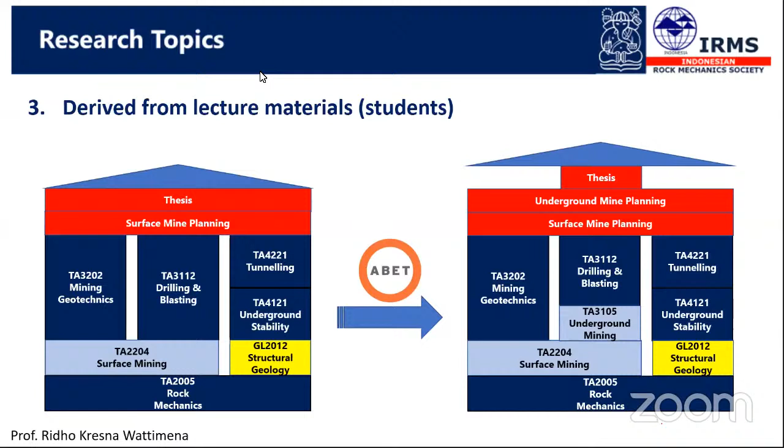Talking about the students, this is the building of our curriculum, especially in what I would call a rock mechanics stream. On the left-hand side is our curriculum before ABET came to our university. At the beginning we have rock mechanics as the basic subject, and then surface mining, structural geology, mining geotech, drilling and blasting, underground stability, and tunneling. We only had one design subject, which is surface mine planning, and then thesis for the undergrad was still 5 credit units.

Starting two years ago, ABET came to ITB to do the accreditation, and they requested us to add more subjects in underground mining. So we developed underground mining subject and underground mine planning. Now the thesis for undergrad is reduced from 5 credit units to only 2, because according to ABET, undergrad students are not researchers, they are designers. So we had to add more subjects on design and planning, including underground mine planning to support the thesis of our undergrad students.

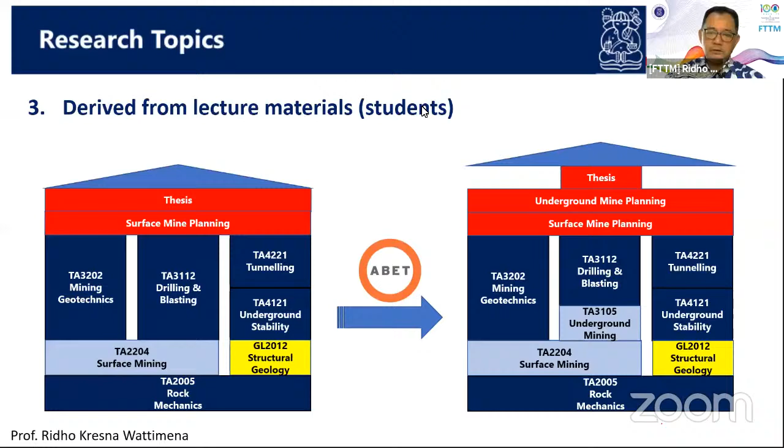Next please. This is some examples of our research - I cannot put it all in one slide. I would start with rock characterization. As Pak Seno mentioned earlier, we have many researches in rock characterization, both in laboratory and in field.

We have long-term strength determination in laboratory, either with UCS test or with shear test. We also develop, still in laboratory, hydrofrac simulation to study the best direction of the spray in creating fracture in the rock.

We also have a number of resources for underground construction. For example, we used to have a Goodman jack - it's already gone because of the disruption when we did underground research in one of the underground gold mines in Indonesia. When we had the Goodman jack, we did some measurement of rock deformation modulus on site. We also did some research in determining the in situ stresses in field directly or indirectly in lab.

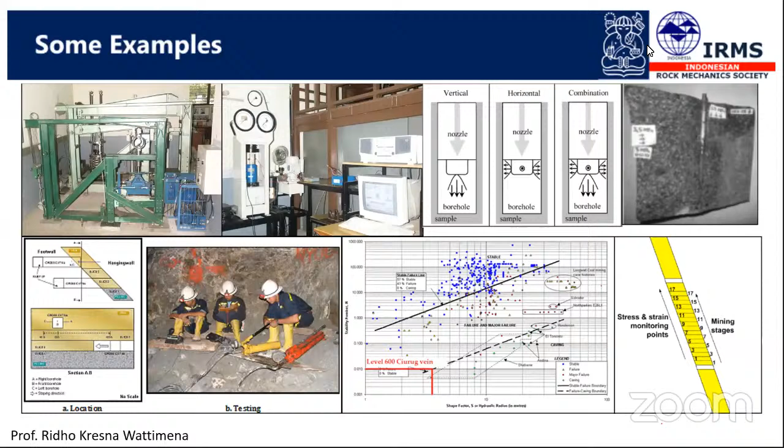But now with ABET, the main team members of the research are only postgrad students, because as you see, ABET considers undergrad students not researchers but only designers. So that's it, Pak Khamarrul. I took 10 minutes, 54 seconds. Thank you very much.

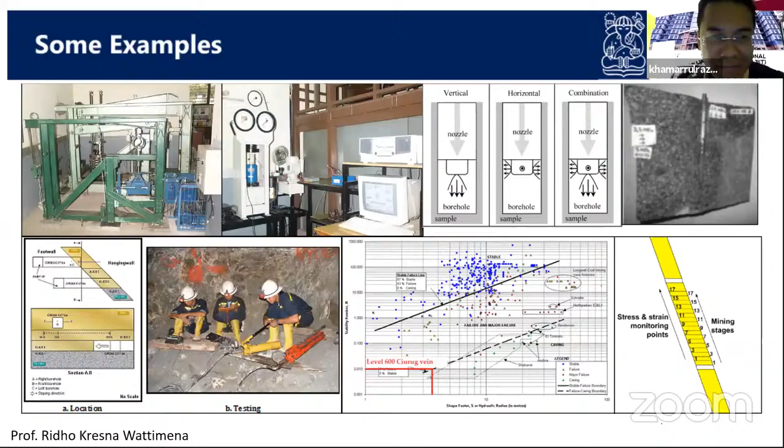Thank you very much, Pak Ridho, for sharing with us. I do believe 10 minutes is not enough for him to share all his experience, particularly dealing with this academic world, as well as how he used theory and fundamental principles and tested it in real environments. I'm happy to see some of the changes you've made in the curriculum related to underground mining topics. Congratulations to your faculty, ITB, for great transformations. I think we have to admit to the needs and demand by the industry. There was some reason behind the move, but I think it's always a positive reaction by the industrial players. Of course, we would like to welcome all the participants.

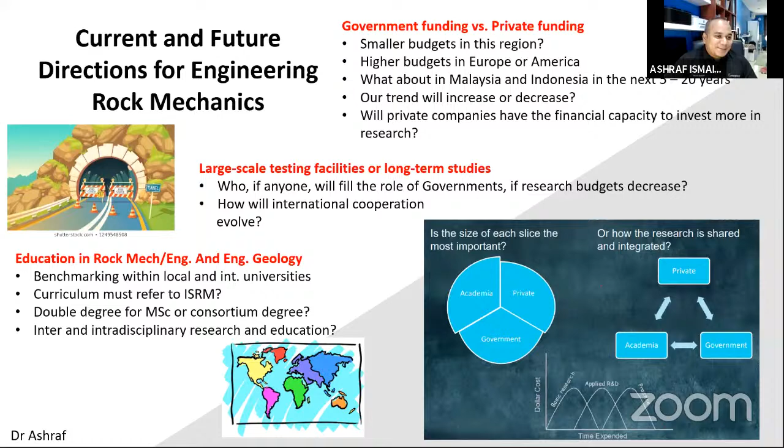Part of our research in rock slope, particularly at USM and in Malaysia, focuses on what we call rock anisotropy, which is one of the well-known phenomena related to heterogeneity in the rock mass. We know that discontinuity in the rock mass is very important because it doesn't have the same and similar strength as the intact rock, and the strength of discontinuity will induce rock slope failure.

So we can see that now by using new technologies, such as UAV photogrammetry, the terrestrial laser scanner, and some image analysis using Cloud Compare and other software, we can optimize the work in identifying the direction and orientation of the joint discontinuity.

As Encik Mak Foh explained at the beginning of the lecture, the fundamental concept is very important, where we as practicing engineers or researchers need to understand the fundamental aspect. For example, the constitutive model and input properties must be correct. But when dealing with rock, it's not just uniqueness that matters—we need to understand the influence of spatial variability, because rock mass is a heterogeneous material. So we cannot rely on a single unique parameter as input; probabilistic sensitivity analysis will play a very important role.

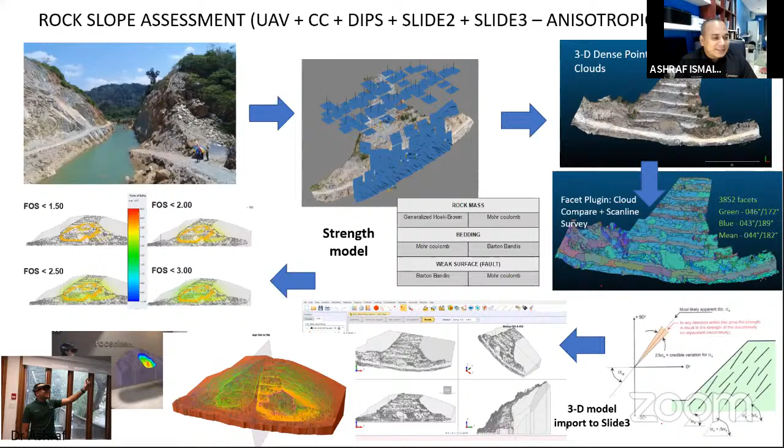A similar comparison study was also done by taking samples from the Shinkansen linear tunnel project in Japan, connecting Tokyo to Nagoya.

We know that the development of faults and shear fracture systems, over a broad range of temperature and pressure, can involve the growth and interaction of cracks, starting from crack initiation.

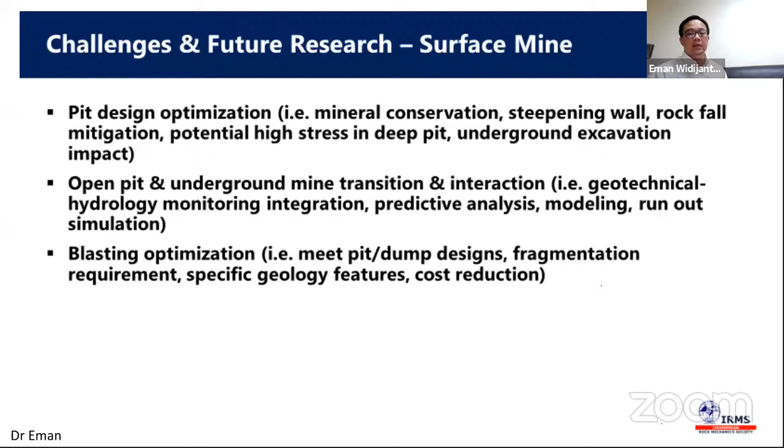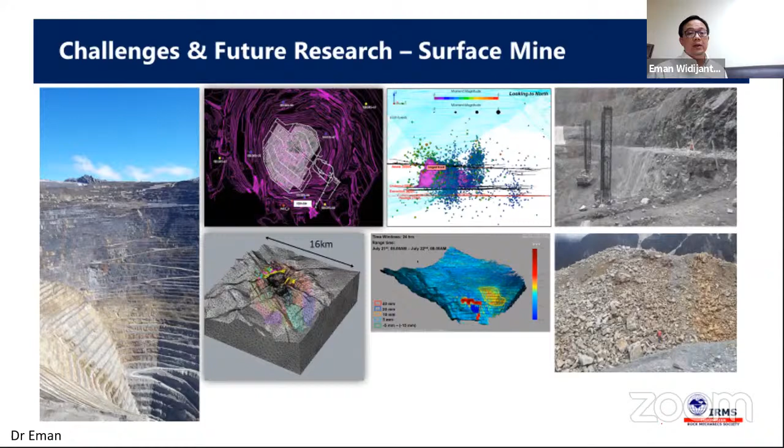Real-time monitoring, through seismic monitoring and different types of scanning systems, are other challenges for us, which we optimize to provide safe working criteria or TARPs, trigger action response plans, to secure our people who work in the underground mines.

We also deal with specific ground conditions for drifting or tunneling, say for example weak ground, squeezing ground. Also, some of the water has low pH, becoming an issue in terms of corrosion, and this needs to be managed in terms of specific ground support requirements.

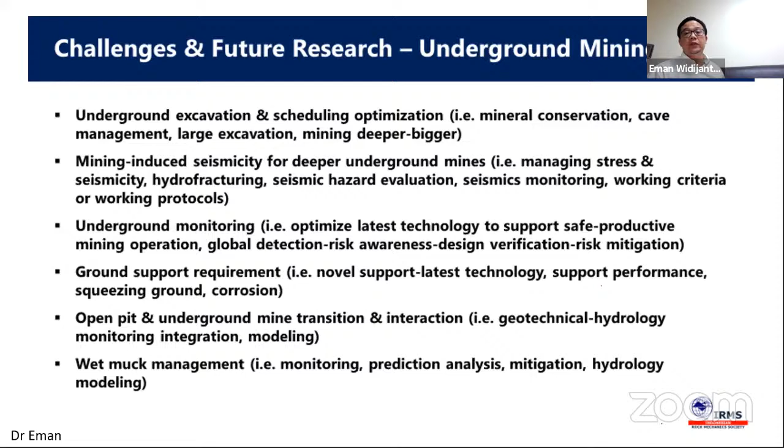Several of them are real-time, and the other is seismic monitoring. This is the monitoring we rely on for supporting underground operations, especially microseismic monitoring, to secure the people and do evacuation once the working criteria has been achieved.

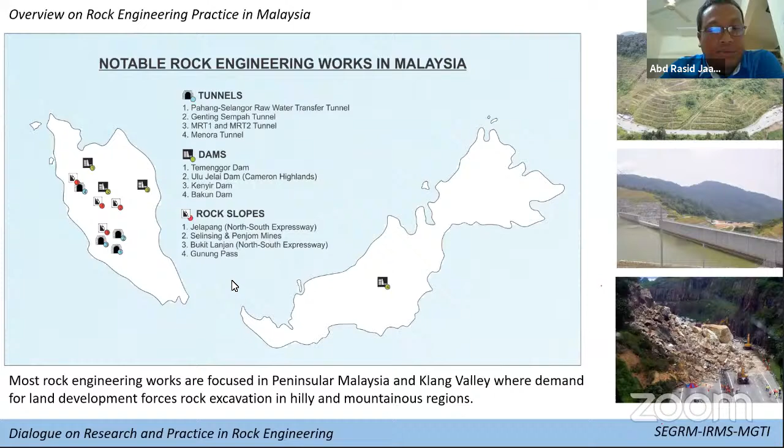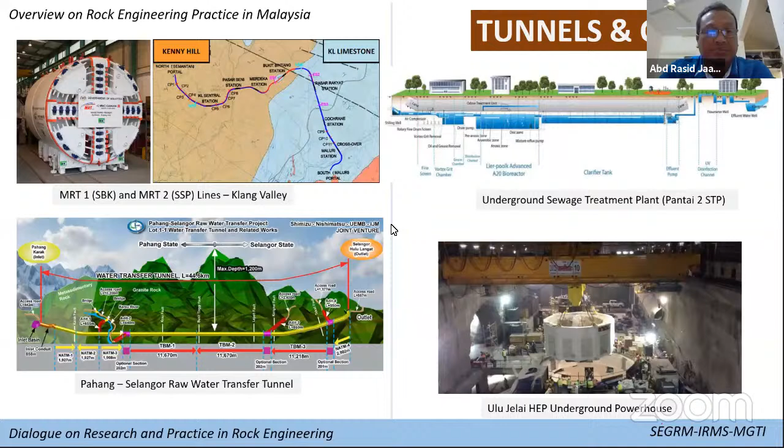Next slide is on dam. This is storm water management and road tunnel. I think this is the biggest achievement of the tunneling community in Malaysia, a multi-award winner. You can get all the information, all the videos on the smart tunnel from National Geographic Channel, Discovery Channel, or many YouTube channels. This is combined stormwater management and road tunnel.

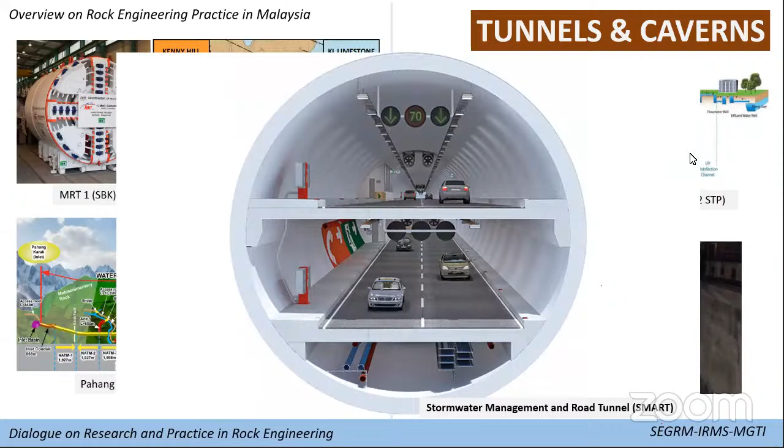During dry periods, when there is no flood, we can use this tunnel as a road tunnel. But when there is high intensity rainfall, then this tunnel will be closed and transferred to become stormwater management, to prevent flooding in Kuala Lumpur. So this is not only smart in terms of the name, but in terms of application as well. Next.

So next is a dam. We have about 52 large dams. Large dam under ICOLD definition is 15-meter height, and then there's several other criteria. So 21 dams are for power generation, 31 for water supply irrigation. I just want to touch on the several dams that involve heavily with rock engineering.

Ulu Jelai hydroelectric dam actually has an underground power station, as I mentioned before, and then in fact they have one fault also crossing near the dam, so it's very challenging in terms of construction of the dam.

And then we have Kenyir Dam, on the top right. So beside the dam, we also have several tunnels for power generation.

And then we have Sungai Selangor Dam, where I was involved with the grouting works, instrumentation, as well as diversion tunnel. They have a temporary diversion tunnel because they cannot stop the water from flowing, about 800 meters drill and blast. Then after completion of the dam, they seal back the diversion tunnel.

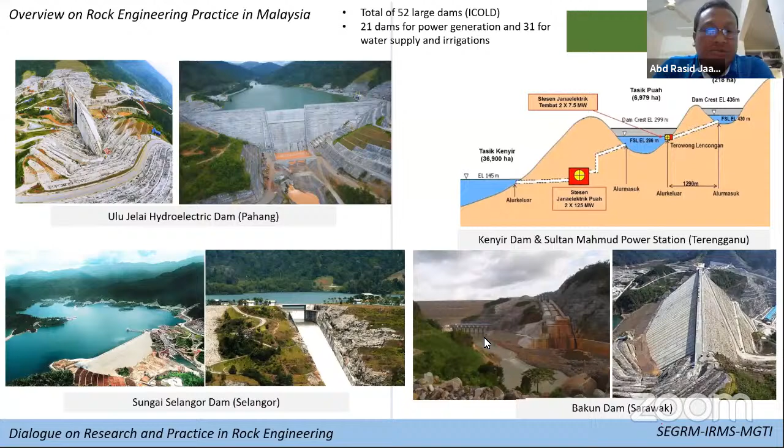Next is rock slope, the next slide. Yeah, this is the last slide. We have many slopes, many rock slopes passing through these highways. We have many highways in Peninsular Malaysia.

One interesting one, on the top left, is Gunung Pass, Simpang Pulai, Kampung Raja Road. This is towards Cameron Highland, if you're familiar with Cameron Highland. So this is a very classic example of how geological factors really control the stability of the cut slope. So you need a combination of geologist and engineer to solve all this problem.

And interesting, if I can recall what Professor Resat, the current president of ISRM, when he presented his short course in Kuala Lumpur three years ago - he mentioned about the soil and rock characterization, when to use soil mechanics, when to use rock mechanics. So it's a very interesting observation actually.

And then on the bottom left we have Bukit Lanjan, the rock slide field. It did not kill anybody, but in terms of losses, actually this is among the biggest losses due to the rock slide or landslide, because the road closed for almost a year, and then a lot of economic activity was affected by this closure of these major roads. You can see the big block is as big as a bungalow.

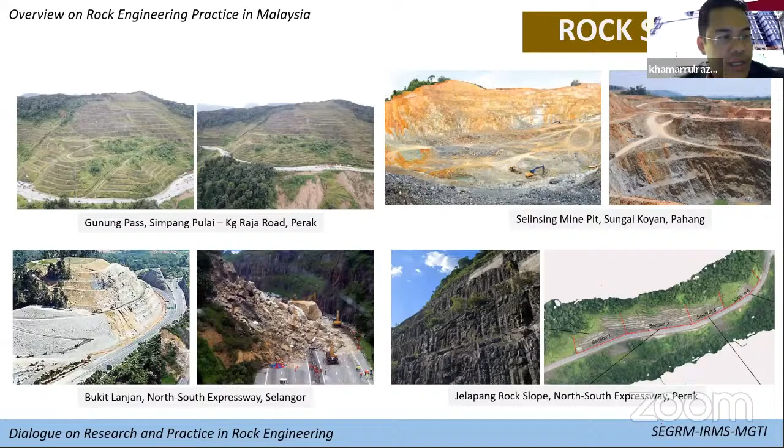Please, Dr. Eman. Okay, thanks again. In this second round, let me start with the first part of our experience regarding development of engineering classification of weathering grade. As far as I know, this was also presented by our colleagues from Malaysia. Talking about weathering, I think it's very important in our country, especially in Indonesia, lying on the semi-tropical equator region, where we have very intense weathering processes. In general, it's expressed by thick residual soil that can reach individual thickness of more than hundreds of meters. This is quite common; we can find it in Indonesia.

In this regard, we developed important indicators and suitable, reliable techniques most applicable in Indonesia, especially those based on the assessment of degree of discoloration of rock material, including rock mass. We also identify changes in mineralogical composition, especially from laboratory analysis. Also, we analyze the destruction of original rock texture and fabric, so we compare rock-to-soil ratio to develop this degree of weathering.

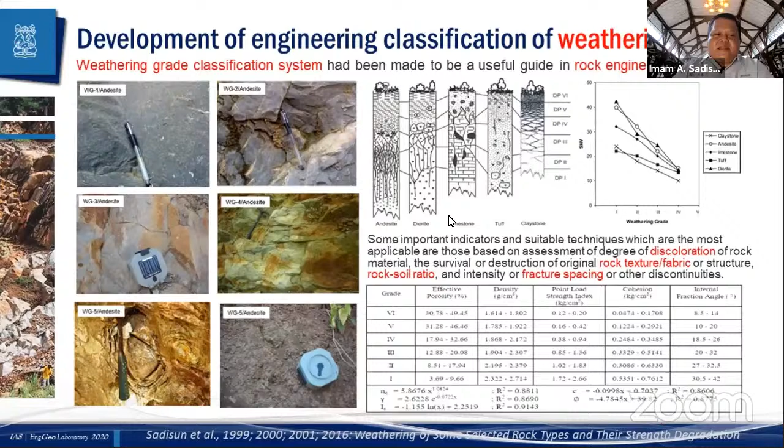Let's move to the second experience, which regards improved slaking index tests for characterizing clay-bearing rocks. This activity was driven by many problems related to the rapid growth of infrastructure lately in Indonesia. We have clay-bearing, or argillaceous, rocks that show physical deterioration behavior progressing over time, which we often call rock slaking behavior.

Due to this behavior, many slope instability and foundation problems arise in infrastructure development, such as in the Cipularang Toll Road in West Java. We also have problems related to this behavior in the Semarang-Solo Toll Road, and in many other places in Indonesia, from Papua to the Aceh region.

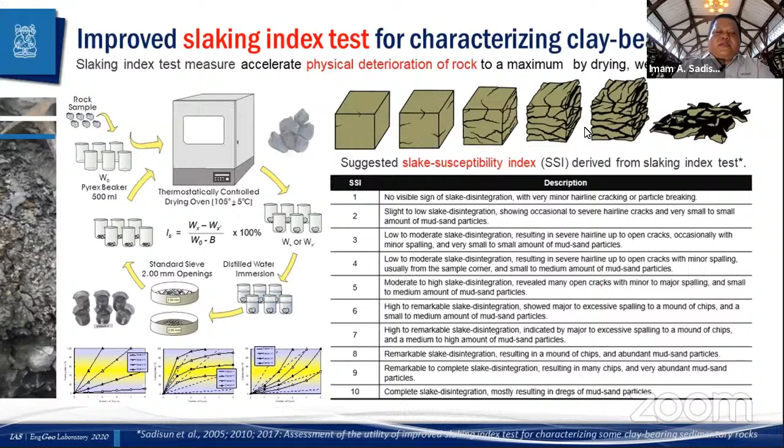Then let's move to the third experience. I would like to share our experience with regard to integrated rock slope stability analysis for slope management. We have main application in Central Sulawesi, especially along a 30-kilometer long segment at the Tawaeli-Toboli National Road of Central Sulawesi. As we know, in that region the topography is very rough, with steep and very steep slopes.

This area lies on metamorphic rocks and also molasse deposits. We already wrote the result of this analysis into a paper entitled 'Towards Development of a Slope Management System along the Tawaeli-Toboli National Road segment, Central Sulawesi.'

In this regard, we made a modification from the rockfall hazard rating system suggested by Pierson 2005, and we give some modification and integration using the empirical continuous slope mass rating suggested by Thomas. You can see some figures related to the continuous slope mass rating in my presentation here.

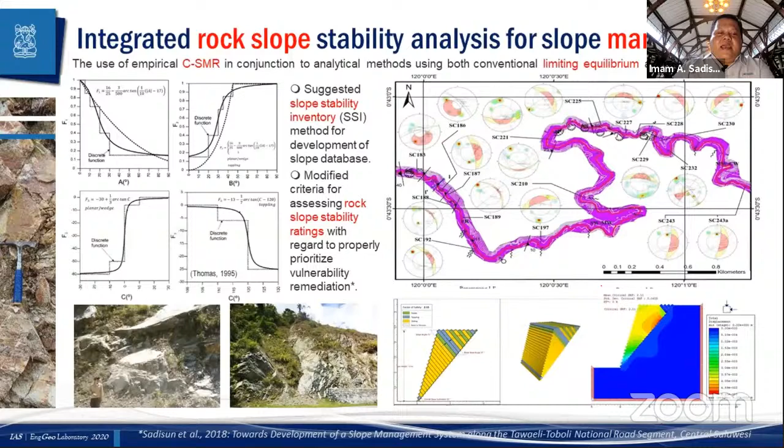And the last research experience that I would like to share today is related to runout distribution modeling of some debris flows in Indonesia.

Talking about landslides, I think Indonesia is also a very prone country for this disaster. We have many landslides that occur especially during the rainfall season, and we have an intensive weathering process, so that's why landslides can be found in many places in Indonesia.

And one of the important landslide types that often causes a lot of casualties and very heavy damage is debris flow. I call this type of debris flow the most dangerous gravity killer in Indonesia due to the lot of casualties it causes.

From this regard, we do modeling. Of course, we applied the concept of the modeling based on the momentum equation and flow mode, continuity of the flow model, and also river condition, erosion and sedimentation process during the flowing mechanism.

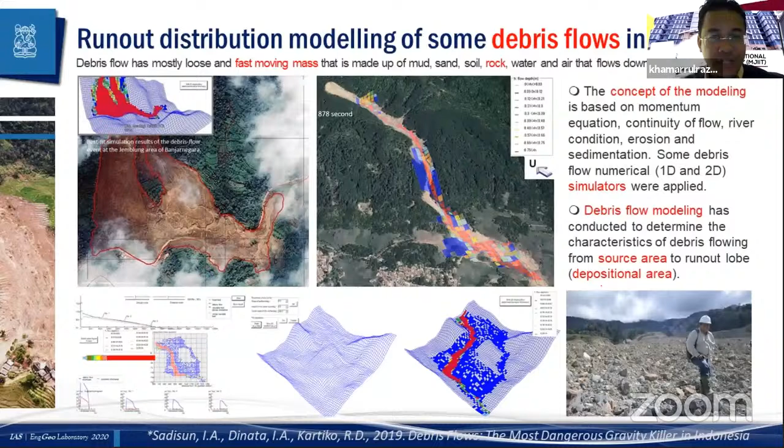So, let's move to the last speaker. We kept it the last one so that everybody got excited. But the only lady in the list of panelists, Dr. Rini, are you ready? I hope we can hear some new insight, story, and experience from the academic world as well as from the practitioner world. So without further ado, Dr. Rini, the floor is yours. Thank you so much, Dr. Khamarrul.

So again, for this cycle I would like to begin the presentation in terms of the academic programs offered in public universities in Malaysia. We have here the University Technology Malaysia, University Science Malaysia, University Malaya, National University of Malaysia, University Malaysia Sabah, University Malaysia Pahang, and also University Malaysia Kelantan. So we can see that the major program offered is more focused on civil engineering.

Of course, there are other programs offered, but now I'm trying to focus on civil and geoscience or geology programs. We can see that most universities offer the Bachelor in Civil Engineering together with the Bachelor of Science in Geology. Some universities offer other programs such as Bachelor of Science in Natural Resource Science and Bachelor of Engineering Mineral Resources at Universiti Sains Malaysia.

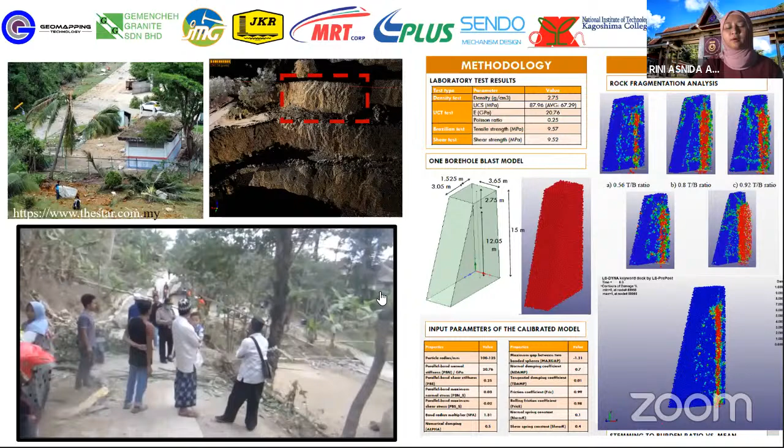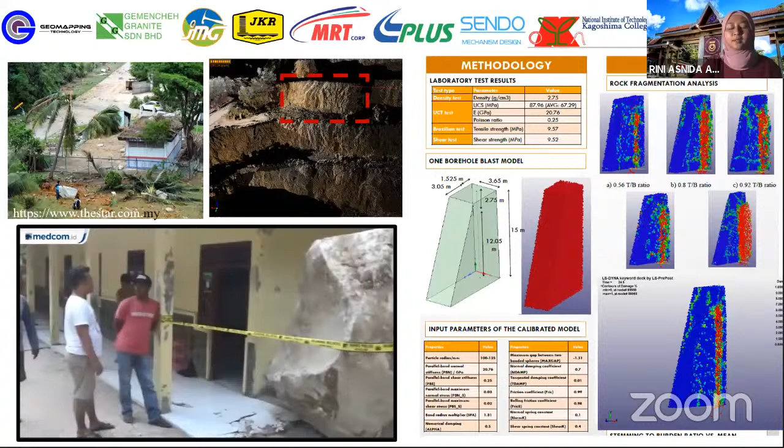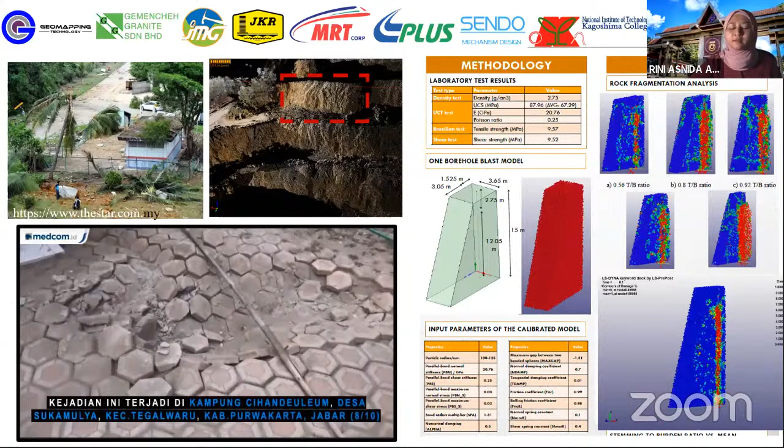Moving on to the research field, this is not only our own interest but involves collaboration with industry. We have many industry collaborators such as GMT, Gemencheh Granite, and authorities like MRT, JKR, and JMG, as well as international collaborators. We have Sendo Mechanism, which provides 3D transducers to monitor displacement in three dimensions.

We also have a very long relationship with the National Institute of Technology, as well as Chongqing University from China, where we are working on transparent soil and AE.

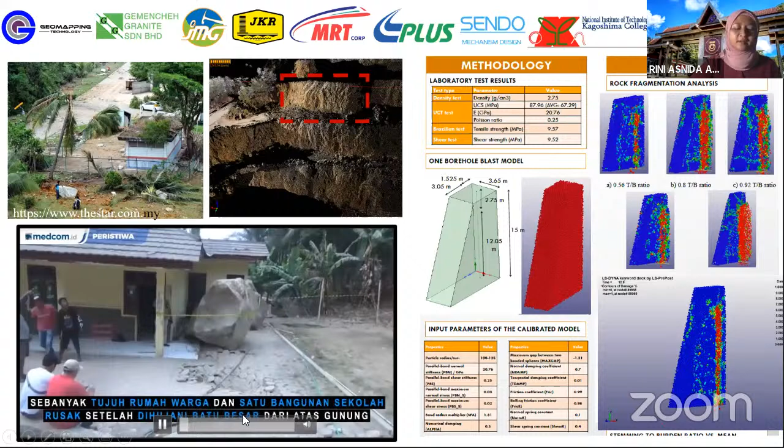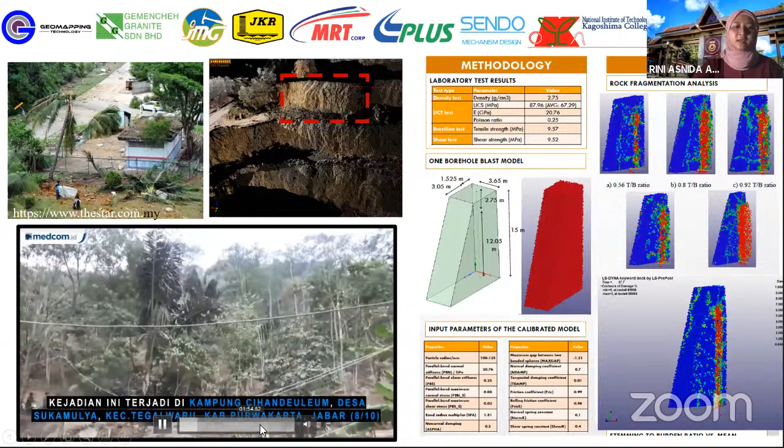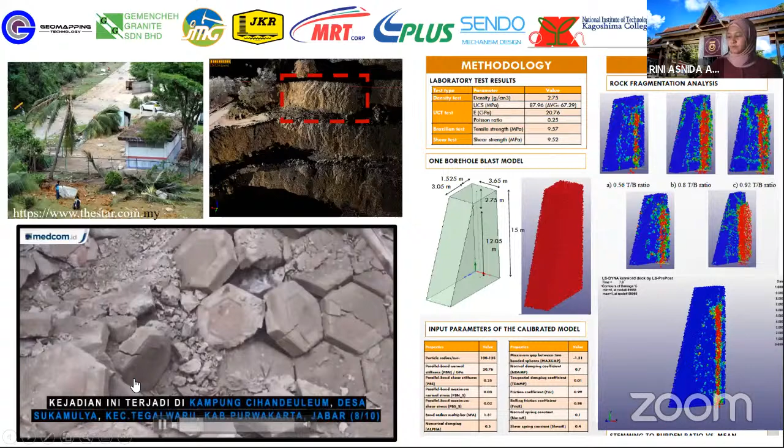There's a lot of research ongoing at UTM, but here I'd like to show some recent ones. You can see the video on the bottom left, which is quite famous on YouTube - this is the flyrock incident in Indonesia, and in Malaysia we experienced similar events. At the top left we have the Masai flyrock that occurred in 2013, and other events in 2008 in Perlis and in 2019 in Ipoh.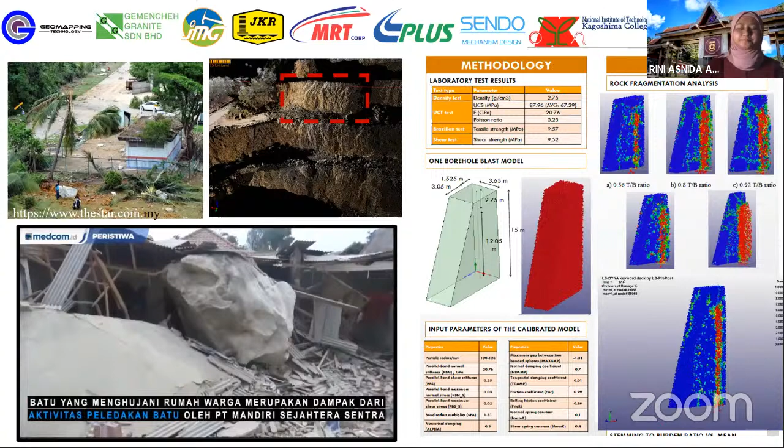So we can see that there is a need to understand, because if we want to carry out the study, you need to have a problem that we want to search. So that will be a better kind of research where we can contribute back to the industry or to the community as well.

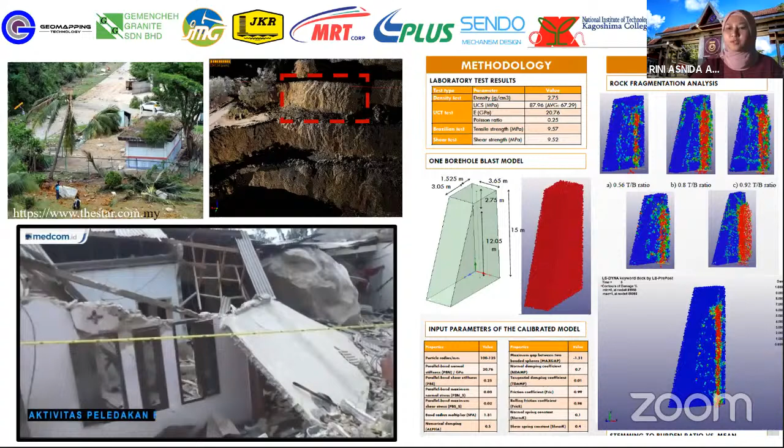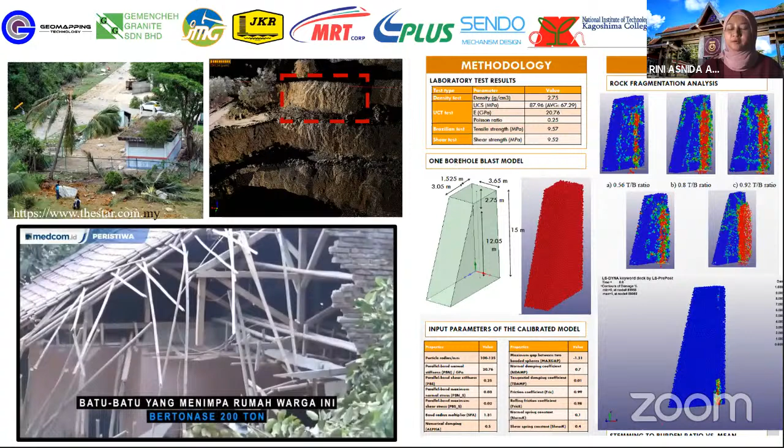In this study, my student worked more on the numerical modeling, because it's hard to set up a laboratory scale of blasting when you are dealing with high health and safety issues. We worked with the Gemencheh Granite Quarry, so we carried out a series of parametric studies in the discrete or particle flow code, in addition to LS Dyna as well.

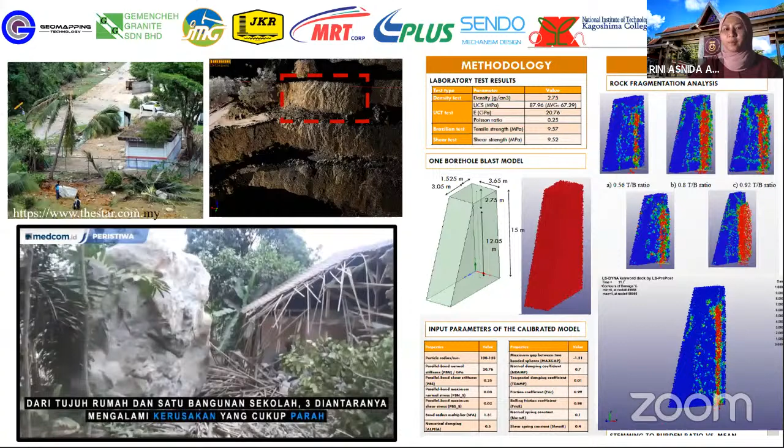So we use the bonded particle model, right? We tried to have different parameters that contribute to the fragmentation analysis of the rock, by having a series of parameters such as the spacing, the stemming, the burden, and so on.

So this model is still ongoing. We try to improve it so we can have a better understanding of the fly rock condition.

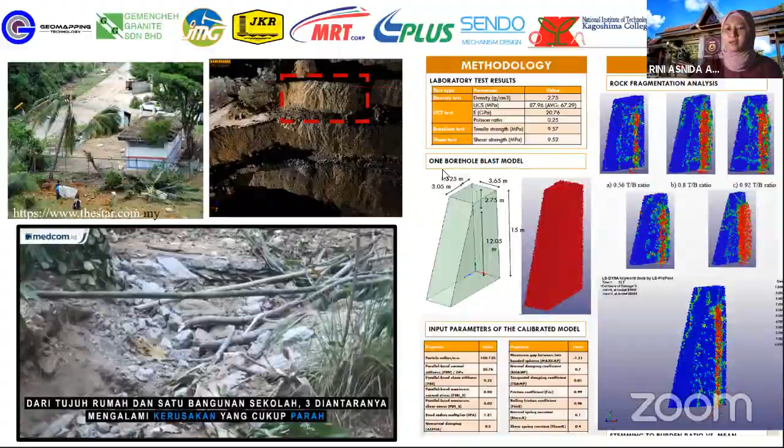So the next session I'll try to highlight here is in terms of the application of technology. Now we know that we are moving on to IR 4.0, big data, prediction, and also smart infrastructure.

Previously we used to have conventional mapping, with the geological compass and so on, but now we try to move on. We have a lot of choices, for example photogrammetry, but on the right side, the top one, we can see what we call the TLS.

It scans and can capture about 1,000 data points within a few hours. So we can get not only the dip but also the dip direction, while at the same time reducing time on site, because sometimes there are safety issues working a long time on site, or limited access. So TLS will be a solution to geological mapping.

But of course we cannot totally rely on the TLS itself. It needs to be verified by spot geological mapping.

The next thing we can move further into is the geophysical method. We have a few methods, like seismic or resistivity survey, because previously in civil engineering we liked to have site investigation, the borehole, to see everything in real. But it will cost a lot, and the borehole will only give you one point of information.

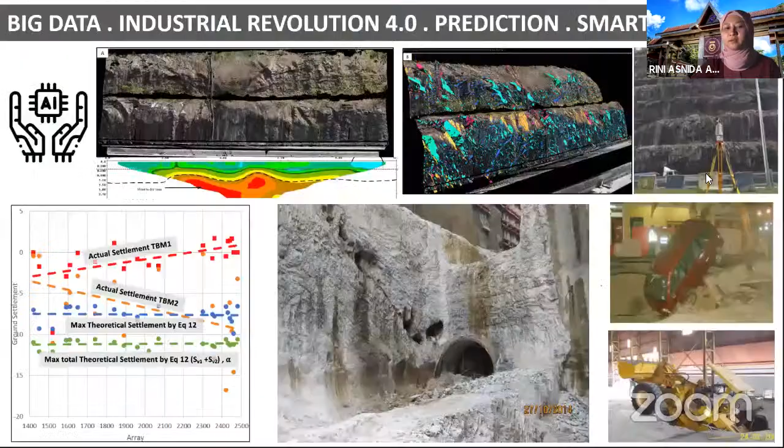I think at the same time, we also tried to move on to the laboratory scale as well, so we can gain in-depth understanding, not only from the lab scale but also based on numerical modeling.

By using this transparent soil, we try to see how the deformation actually behaves, and we also try to model this not in the greenfield, but with loading applied, so we can try to replicate what actually happens on-site rather than the greenfield condition. These are the two approaches my research students are working on, towards prediction and also using big data.

Right, so I think that's all from my part. Maybe I will talk on the beam rock in the next session, I hope I can still have time for that.

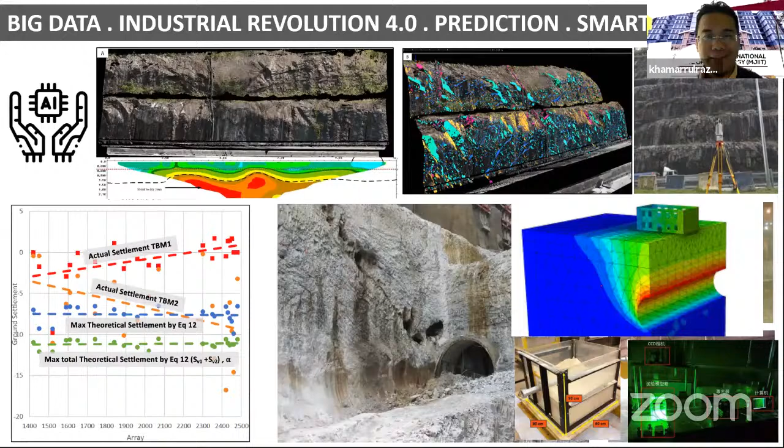Thank you very much, Dr. Rini, thank you for your very timely presentation. I wish to hear more about the technology you implemented in the field, and how your academic knowledge, some theoretical knowledge, was implemented in the field. And I like the quote you mentioned about whatever technology or advancement, we talk about cost saving and also time saving. Very interesting remarks.

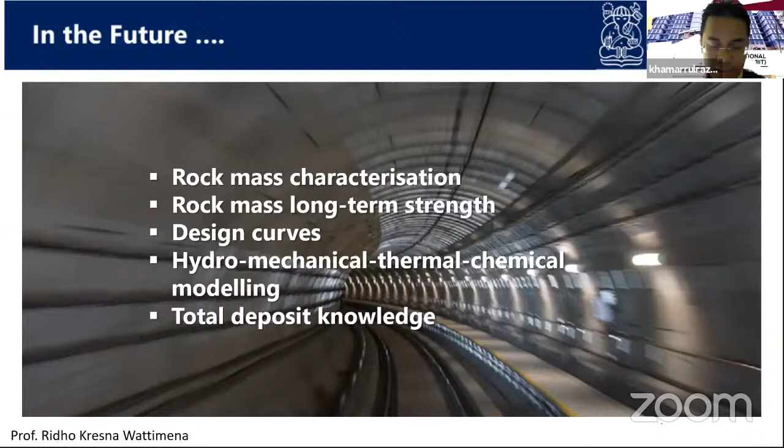That's it, Pak Kamarul. Terima kasih banyak, Bapak Pak Ridho, for the last point. I hope some of us will pick up some of his suggestions. We have to bear in mind that we still need to explore rock mass characterisation, and Professor Ridho mentioned this total deposit knowledge concept, considering not only cost and revenue, but also the consequences. Thank you, Bapak, for the final remarks.

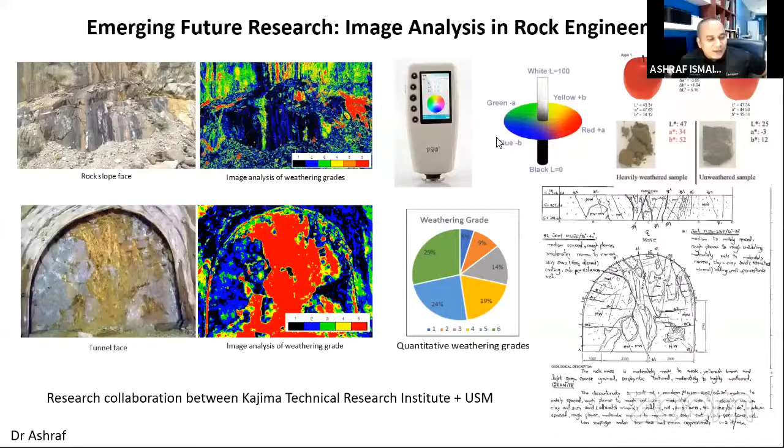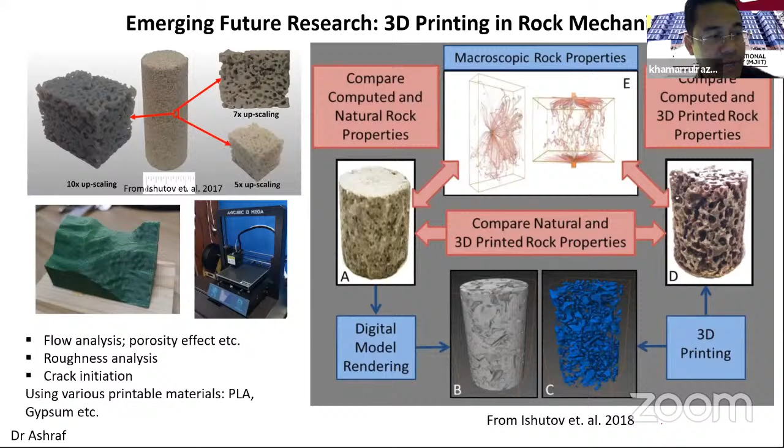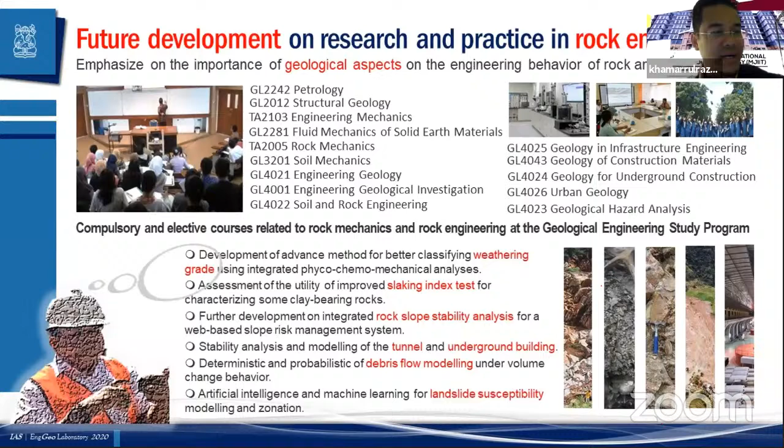I think there will be a good future for us, Malaysia and Indonesia, to work together, because we are in the same climate condition. I believe that we have the same problem as well.